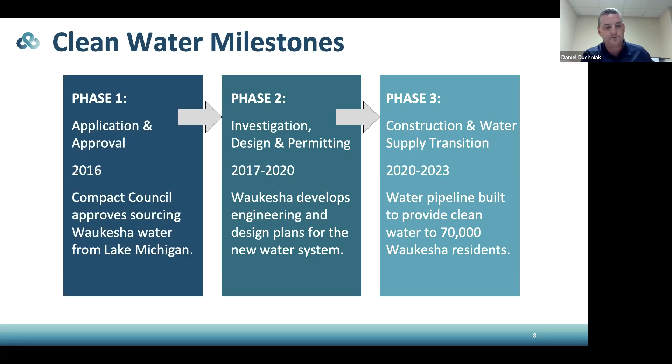Thank you, Dan. So as Dan mentioned, phase 2, which began in late 2016, early 2017, involves the investigation, design, and permitting of both the water supply and the return flow systems for this new water supply. As part of that process, we had to do an evaluation of the routes to get the water from the city of Milwaukee to the city of Waukesha, and then back from the clean water plant located in the city of Waukesha to the Great Lakes, Lake Michigan watershed via the Root River at a location in Franklin. That evaluation was done over the course of 2017 and 2018 to evaluate a number of routes.

The evaluation was based on various factors, including the size of the right-of-way and whether or not there was space for this pipeline to go in, the traffic and classifications of the different roads, and environmental impacts, including things like wetlands, waterway crossings, environmentally sensitive areas, or habitats in particular. All of those factors go into selecting the route.

At the same time, we were trying to identify different locations that could be used for booster pumping stations along the route. We looked at approximately just under 20 sites for this booster pumping station in detail, going through evaluations that included some of the same type of criteria, with an emphasis on site availability and proximity to the city and the distribution connection, and then also to the utility headquarters and the administrative building in Waukesha. So those are two factors that you add onto the route that are critically important for selecting the site.

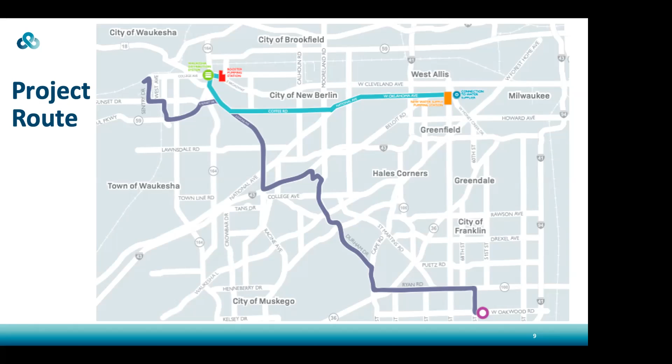So if we go on to the next slide, I'm going to focus in on the booster pumping station, as that's really the focus of this presentation, and talk about this site. As I mentioned, we looked at almost 20 sites for this, approximately 17 for the booster pumping station. So I want to give you an idea - when I use the word booster pumping station, I'm talking about the whole site.

That includes the booster pumping station itself, which is a building that will house the pumps needed to supply the appropriate pressure for the distribution system in Waukesha, and those are located in the basement of the building. It also has some chemical addition facilities. There are 2 chemicals that will be stored on site with appropriate containment, and everything is rated and tanked, and they're very common chemicals. They are used for disinfection by Milwaukee already, and they're there just in case we need to adjust the disinfection to the water before it goes into the distribution system.

LAS, which is liquid ammonium sulfate, will be stored on site as a common ingredient in fertilizer. And then also sodium hypochlorite will be stored on site, commonly known as bleach. That's the chlorine element to form the chloramines to disinfect the water before it enters the city, and again, keep that disinfection level at the residual we want to keep the water safe.

Additionally, there are water reservoirs located at this site - there's 2 of them, and they are ground storage reservoirs. Those two reservoirs collectively hold 18 million gallons. We have that amount of water on site at this booster pumping station because there is a single pipeline coming to the city of Waukesha from the city of Milwaukee. We want to make sure we have enough water on site at that point of connection with the pumps, able to supply the city with water for 2 full days, if there was an emergency with either the booster pumping station in Milwaukee or something along the pipeline.

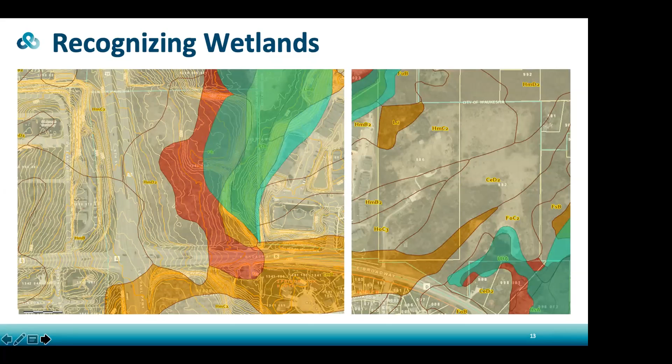If we move on to the next slide, even on the three REMPE properties and the Nike site, there are even more environmental considerations. So when we're doing our site evaluations, we have a number of sites, we get down to a few, then we get down to the actual site itself, and we do a number of layouts on the site to see where we can do the least amount of environmental impact and the least amount of earthwork, and really try to be mindful of the cost involved. We want to not disrupt contaminated soils, not disrupt environmentally sensitive areas, and stay away from any existing buildings as much as we can. That's why we looked at a number of different layouts.

For the water infrastructure, there's more wetlands on the eastern Rempe parcel, and there's also an existing ATC overhead line easement with high voltage power lines going through there. Those power lines usually run approximately between 80 and 200 feet. You've probably noticed those overhead power lines as well, and that's an easement we couldn't build on.

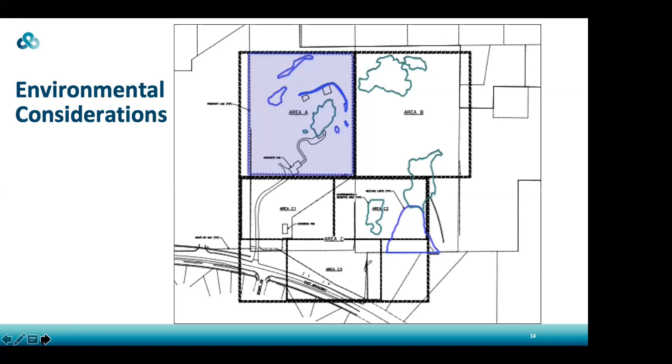So when you look at trying to get 10 contiguous acres while staying away from these environmental considerations, if we move to the next slide, you can see that it pushes us down into the corner of the site, which is the site layout you may have seen on the website, or can go look at afterward. I'll show it on the next slide too, but we'll stay here for now. We found this location that will work for the infrastructure.

By putting the infrastructure closer to the road—and there were a number of questions about why it needs to be here, so hopefully I'm answering those—we get pushed down to that corner because of the environmental impacts and considerations. Then using the topography pushes us down into the flattest part we can find.

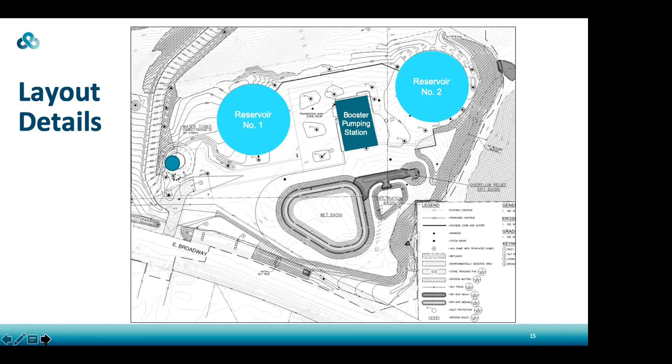That's where the old missile infrastructure was. By working with the Parks Department and the Rempe family, we're able to double the park, and it's actually going to be deed restricted to remain park.

I just want to point out too that there's going to be the ability to put in different amenities as part of the park. We're working with the Parks Department on that, and they'll be going through a master plan process, so there'll be an opportunity for the public to provide feedback. Some of the ideas they've talked about are things like a dog park or disc golf courses, and a number of trails, especially since this is rolling hills through here, so nice hiking trails you can go through. That'll all be protected as part of this park.

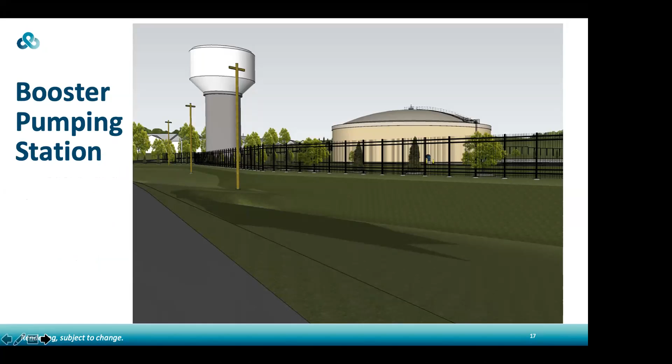This is the preliminary booster pumping station rendering, one of the preliminary renderings. We've heard your feedback through both the PSD process and the questions coming in before this open house. This was a preliminary rendering to try to give a sense of what the site was going to look like. It doesn't have all the existing trees, that's fair, and it doesn't even have all the trees we're going to end up planting. We're going through this process to get feedback on what you'd like to see.

We've heard a lot about how we need to increase the number of trees and increase the screening to the best we can. Another thing I want to mention on this booster pumping station is that we're showing these with the trees at the height they would be, kind of mid-mature. There was a question about why we didn't have mature trees like we had in New Berlin, and there was a comment during that process with a concern that we were showing the trees too far along, because it's going to take some time for these trees to mature.

We're going to be planting them at about 8 to 10 feet in height so that they are viable and can grow. Any taller, more mature than that, they tend not to be viable. We'll be able to gather your thoughts on that too as we move through the Plan Commission process, but we have heard the comments and we'll be adding more trees, and then we'll be doing final renderings for the Plan Commission process that'll have more of that addressed.

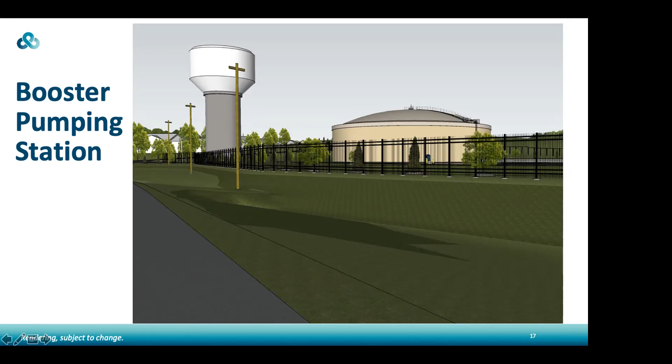It'll also have more of the background here. You can see the hill of the park, and a little bit of the trees, but you don't see all the trees that would be up close. So those are some details that we'll add as we get farther into the process. And I've mentioned the Plan Commission process a few times—I'll talk a little bit more about that timeline when we get closer to the end here.

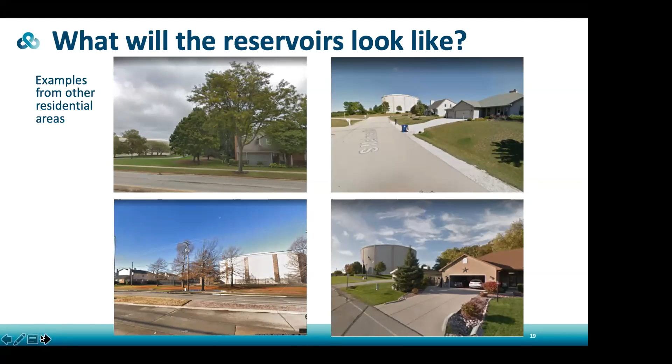And with regards to dangerous chemicals being across from homes, they are not dangerous chemicals. The sodium hypochlorite is actually liquid bleach, a stronger liquid bleach. The chemicals we're suggesting at this site, or chemicals similar to them, are held at our booster stations right now that are in neighborhoods across the street from schools.

So they are safe, and if there was a compromise of the chemical, they're constructed with containment areas, so all of the chemicals would be held in a containment area and there would be no contamination as a result. Again, we hold chemicals. The sodium hypochlorite is held throughout the city at a number of different sites, and we use a different chemical for corrosion control right now, similar to what we'll use when Milwaukee comes online, but both of those chemicals are stored regularly at sites throughout the city in residential areas across from schools. So there is no harm, no concern related to those.

So now the next question is, do the Rempe trustees know that the land they gifted the city for a park is now going to be situated behind these monstrosities? And as a water person, I would not call them monstrosities.

We do try to blend in with the neighborhoods, but the Rempes were very aware, and they were very encouraged by the doubling of the park and the commitment to forever protecting that land, rather than it being developed into apartments, workforce housing, or an extension of the industrial park that is in this area, because all of those could have been potential developments for this area. I don't believe it would not have been developed in the future. As we saw, there was the memory care facility that was proposed there, and I'm sure they would have been developed at some point.

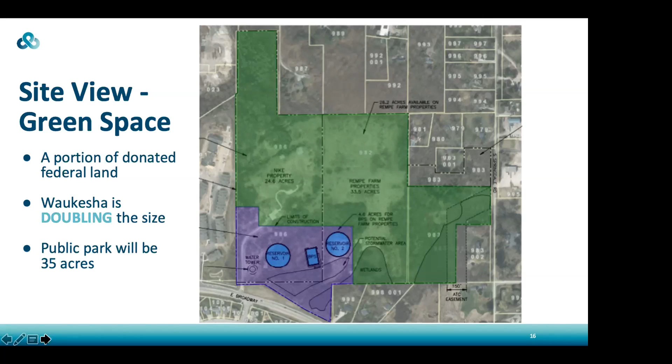I think about this more globally. Again, we're reducing impact to the aquifers, wetlands, and waterways that they are negatively impacting. We're reducing the unintentional mining of Great Lakes water in the groundwater, and we're bringing in water from the Great Lakes and returning it to the Great Lakes, resulting in no net loss to the Great Lakes, and recycling and reusing that water, which is completely green.

And we are working with all the neighborhood communities on this regional solution. We are working with not only Milwaukee supplying us the water, but going through Milwaukee, through New Berlin, into Waukesha, and returning it back through New Berlin, through Muskego, through the city of Franklin, discharging into a river that goes through Oak Creek, through Caledonia, and through the city of Racine. We have worked with all of those communities, addressing all of their concerns on impacts to the discharge to the river, and shown them that it's going to be a benefit to the river. So if there is ever an example of a green, sustainable project and infrastructure, this is the prime example of that.

The next question: what sources of renewable energy will be used to power the station? We are not using renewable energy, but we are using water and energy efficient fixtures throughout. We're also investigating potentially recapturing energy from the return flow pipeline and utilizing the highly treated effluent for non-potable uses. So there is a lot of renewable investigation going on with this project.